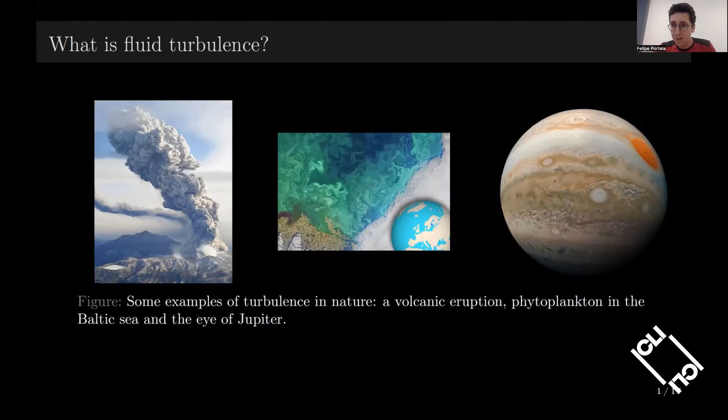And it's a strikingly similar picture to the one on the right, which is of a satellite view of Jupiter, where the rotation of the planet gives rise to currents, and these currents give rise to these very chaotic motions with very similar behaviors to what we can see here on Earth.

So, as I said, giving a definition of turbulence is quite complicated, but we can describe its properties, and the two main properties are its multiscale nature, which is something that you can illustrate with the concept of fractals in mathematics. And we have this figure here on the top left. So the concept that you have embedded in your problem a lot of different scales. So you have these very large swirls, but once you start zooming in, you see that you have smaller swirls and smaller swirls that seem to replicate the larger global structure of the problem.

But it's also a chaotic problem. And what that means is that it's very, very hard to make long-term predictions, because any minor departure from, let's say, from your initial condition, or if you have some uncertainty in your data, once you try to make long-term predictions, a small deviation at the beginning will give rise to very, very different outcomes.

And so the classic example we have for chaotic motions is that of a double pendulum. If you lift this pendulum and you let it swing, then you start to see that it just goes around in an arbitrary, chaotic motion.

And if we combine these two top pictures and we look at the bottom figure, which is showing ocean currents, we can see these two properties quite clearly. We see that these lines that I'm showing are basically the paths that the water is going through, the direction in which it is going. And they're extremely convoluted, they're very wrinkly, but they seem to have some underlying organization. And you even see some patches where things are swirling around in the same place. And so that would be the fractal property of this flow.

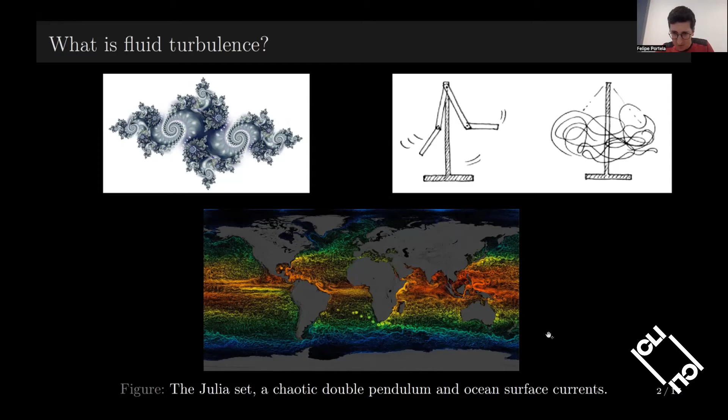So other examples, quite classical examples, are the Starry Night by Van Gogh. And you can see again these swirly motions in the drawing. And you have here on the right this Great Wave off Kanagawa, and here you can see quite well depicted the idea of a fractal structure. So you have the breaking of this wave into these large patches, but each of these patches is replicated into smaller and smaller patches. So if you were to zoom into this picture, you would see a replication of the large scale picture.

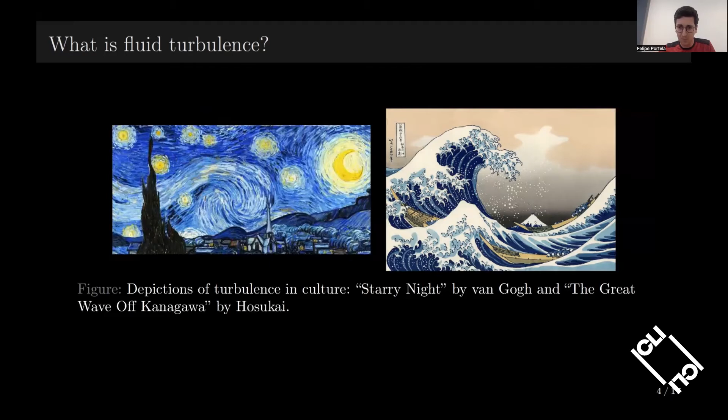So I'll keep equations to a minimum, but even though we had these pictures of fluid flow from the 15th century onwards, it wasn't until the 19th century that we had the mathematical description of the motion of fluids. And these two guys, Claude Navier and Sir George Stokes, came up with these equations which depict the simplest possible motion of fluids. So the top equation simply means conservation of mass. If you draw a box and you have fluid flowing through that box, then the top equation tells you that whatever goes in has to go out.

And the bottom one is a more complicated version of Newton's laws of motion, but it simply tells you that if you apply a force to a fluid through this pressure gradient here, so you apply pressure on the fluid, it will resist with a force which is due to its own internal friction, and the resulting balance or imbalance will result in the acceleration of the flow, which is on the left. And the acceleration looks a bit weird.

You have this term here, which is the complicated part of this equation because it's a so-called nonlinear term. And so once you start having small deviations in this guy here, the fluid velocity, this produces a plethora of different scales of motion. And for mathematicians, this is quite an interesting problem. They're actually offering $1 million for anyone that can show that it is even possible to solve these things by hand.

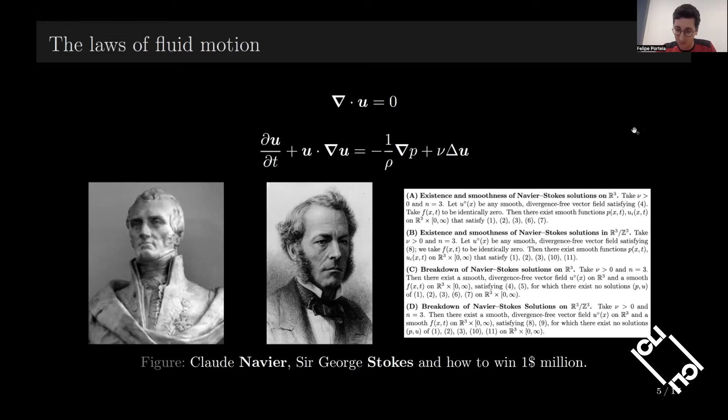So that's not really a problem that I'm concerned with because I'm an engineer, so I don't even understand the wording in this text. What we want to do is find ways to come up with models and make predictive statements about different turbulent flows.

Now, the interesting part of this is that it tells us that the same equations of fluids apply to any problem that you want, so long as you can rescale the problem in terms of this single number. And these two figures on the right illustrate this, in my view, quite well. We have here a cylinder which is immersed in water. And you see that you get these patterns developing downstream. So you're pushing fluid past a cylinder.

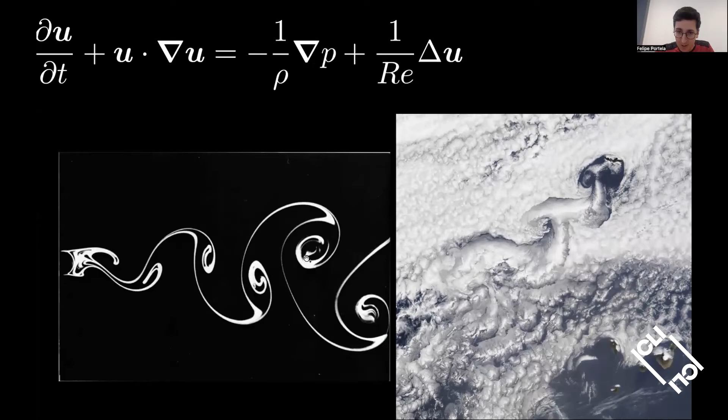And on the right, we have atmospheric flow past the Madeira Island off the coast of Africa. And perhaps if I zoom in a bit, you can see these swirly motions, which resemble very much these ones that you can produce in the laboratory. So we're able, through a single number, to rescale the problem down and reproduce it in the lab frame. Okay. So that's it for definitions.

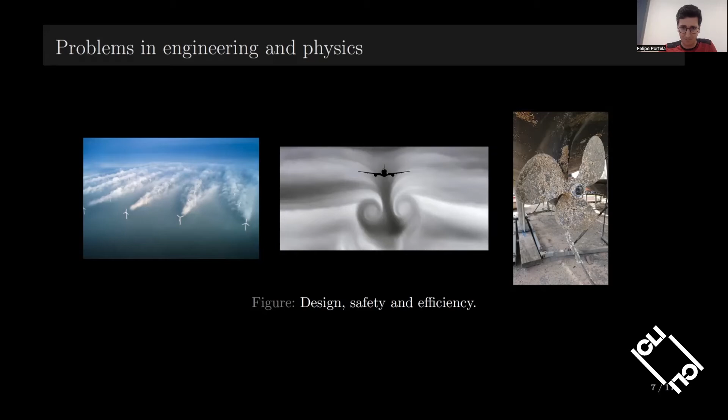But also, as mentioned by the introduction, in terms of climate, which is a very current problem, we need to understand how our actions now are going to impact the long-term climate. And as I said before, because this is a chaotic problem, it's extremely hard to make such predictions. And so what we need are models that are able to, in a way, give us some confidence or restrict the range of uncertainty within our predictions.

There are many other examples, but as you can see, it's quite a broad range of applications, and the problems are really not comparable between each other, even though they all involve the same physical phenomena. And so the way we tackle this is by reducing the problem to a bunch of simple problems, which we call canonical flows. One such problem is that of a wake, which I already showed before an example. You immerse a body in a fluid, you force the fluid past it, and you study how the flow moves behind this body.

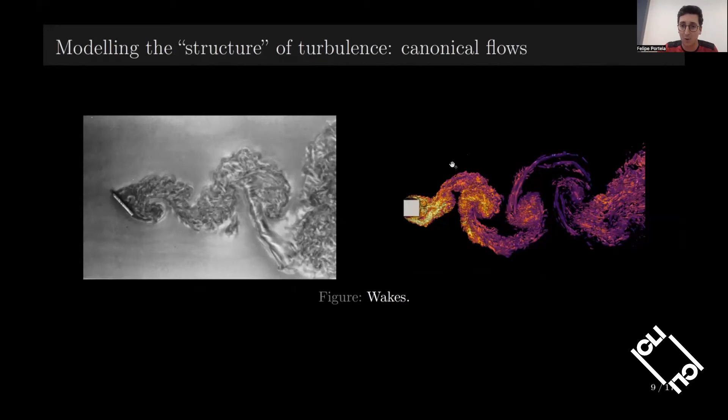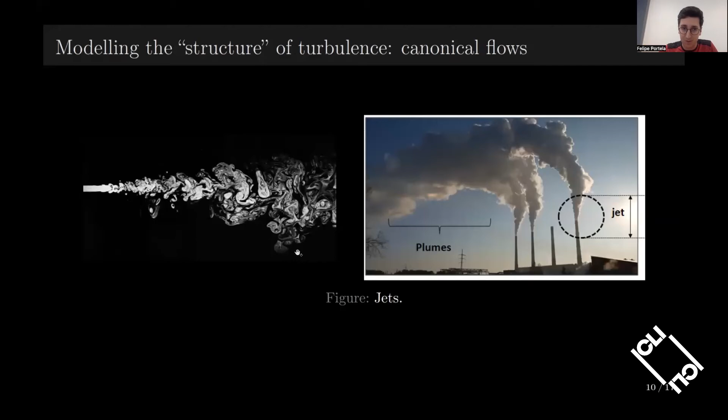And if you think of a mountain as creating an obstruction in the motion of the atmosphere, then on one side you have the fast-flowing atmosphere, and on the other you have, well, stagnant air. And by going over the mountain, you essentially form these large structures, which you can replicate in the laboratory simply by pushing fluid over quiescent fluid.

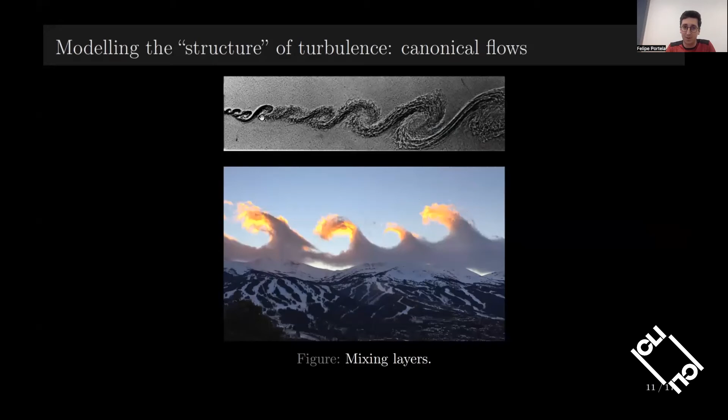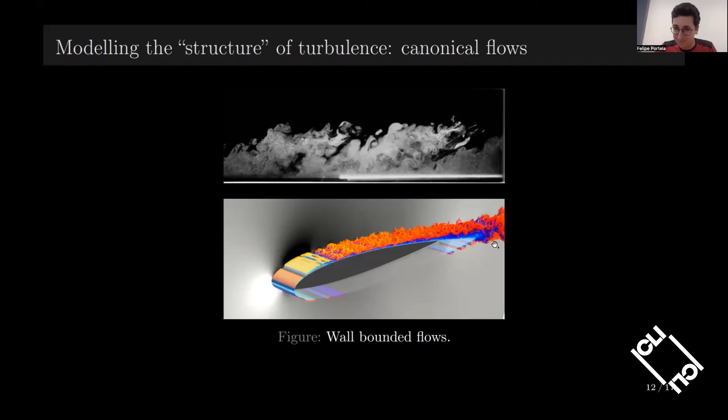Another kind of canonical flows are wall-bounded flows, and that happens when you are pushing fluid next to a solid boundary. So you just have a wall, and you blow air, and you see what happens. On the top we have a laboratory experiment. On the bottom we have a numerical simulation. This simulation is of a wing, and essentially by introducing this solid boundary, you are telling the flow to stop at the boundary because it cannot slip, and because of this condition you are forming turbulence. And so perhaps the most exotic one, I'm not sure if I have time, yeah.

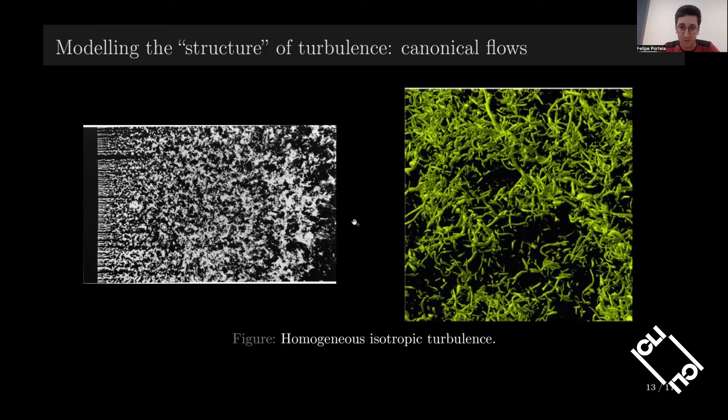How do we model these interactions in these different flows? That's actually my active area of research, something called the turbulence cascade. It was first introduced by a meteorologist called Lewis Fry Richardson in 1922. And it's encapsulated in this very short poem: big whirls have little whirls that feed on their velocity, and little whirls have lesser whirls, and so on to viscosity. What this small poem says is that you have these very large structures, these large eddies that we were looking at before. They break down into smaller counterparts and smaller counterparts until the action of viscosity, which is a fluid resistance, destroys this process.

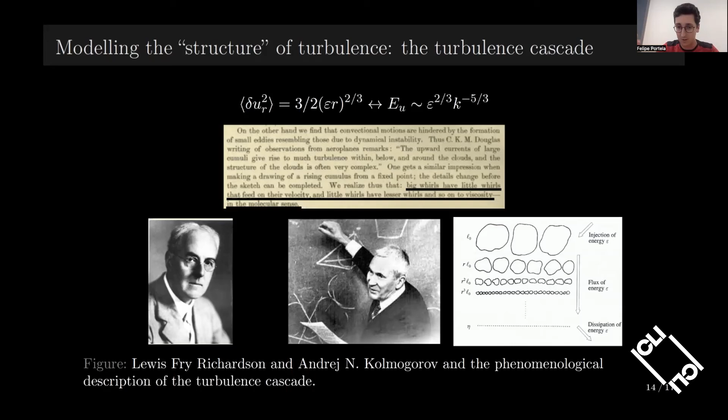And this guy in the middle, called Andrej Kolmogorov, came up in 1941 and produced what is the most successful theory for the turbulence cascade, which formulates this broad picture mathematically and makes actually quite accurate predictions in terms of what the energy of these different swirls should be. Now, the problem is that in order to make this theory, he has to make a bunch of assumptions. We know for a fact that the assumptions are wrong because we can go and test them in the laboratory and with numerical simulations, but the predictions still hold. And so that's the dilemma that we are faced with now in this field of research: how can we arrive at the right conclusion with the wrong hypothesis? And how can we replace this hypothesis with a better one, which can account for the particularities of the flows?

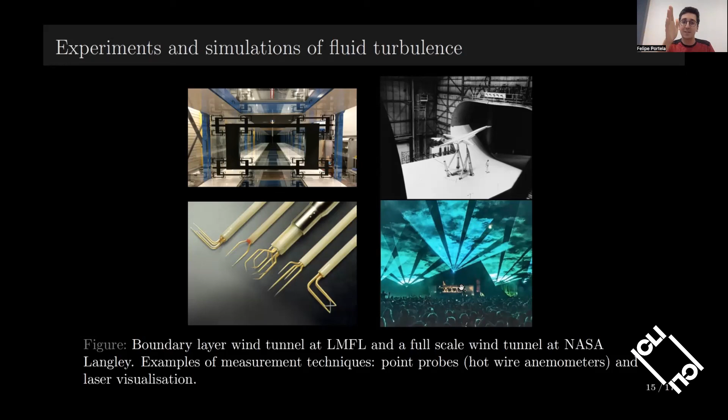And as you can imagine, due to the very properties of the problem itself, these measurements are extremely intricate, complicated, we have extremely limited data from them anyway, because you can imagine if you're just measuring a point and you want to make a global picture of what is going on, that's quite a limited view. If you are shooting a laser, then you don't know what is happening next to the laser, and so on. We also do numerical simulations.

We split the problem, as we see here, into many small cells. Each of these cells is given to a computer. The computer solves the equations in these cells, and then we reconstruct this, and we have a picture of the flow field. Now, what happens is that to do numerical simulations, you have to use physical models, because to resolve all the scales of motion, it's extremely expensive.

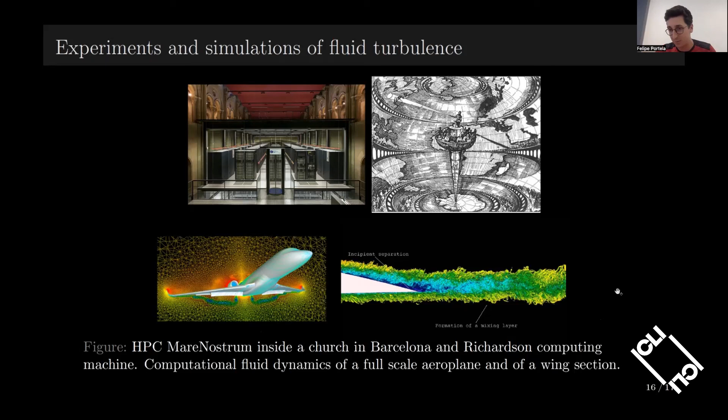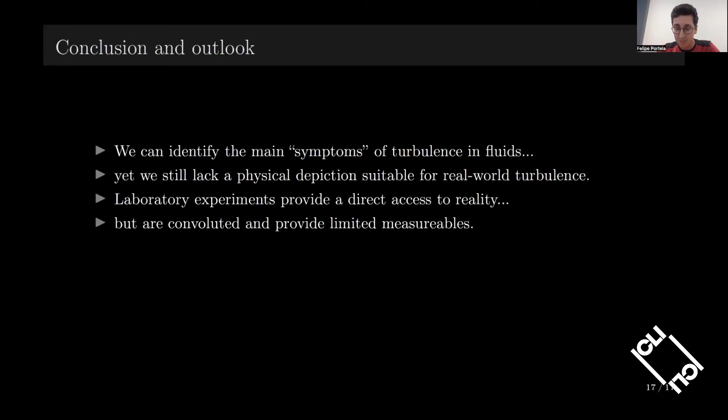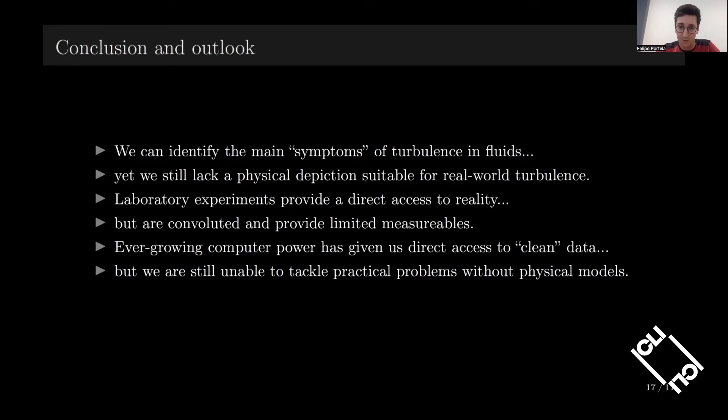So just a summary, my alarm already went off. So we're able to identify some symptoms of turbulence in fluids, but we don't really have an accurate description of what this turbulence is. We can measure these properties in the lab, but it's extremely convoluted and we have very limited data out of it. Computers have been a blessing, but also a curse, because we can never really solve the problem directly. We always need to use physical models, and we don't have accurate physical models.

So with that, I finish with an animation of the work I'm doing at the moment, which is a combination of the two of those canonical flows. I've immersed these two bars in a uniform fluid, and that produces a jet in the middle. You see it produces these small structures going into this flow, but the obstructions themselves produce these very large structures which are organizing the whole turbulence.

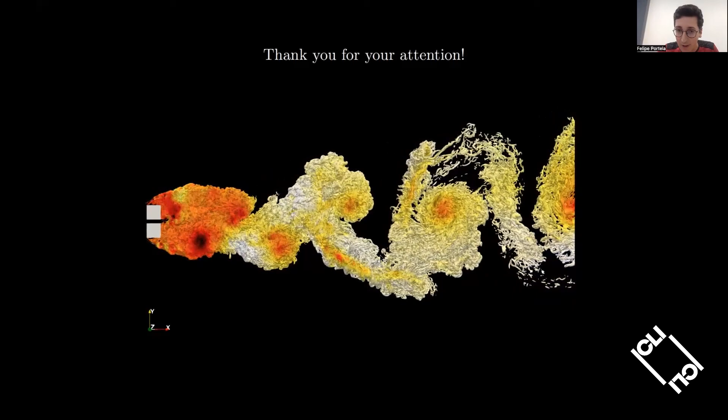And so my current work is to try to understand how each of these small objects here are behaving in relation to each other and how they determine the evolution of the flow as a whole. So that's it. Thank you.